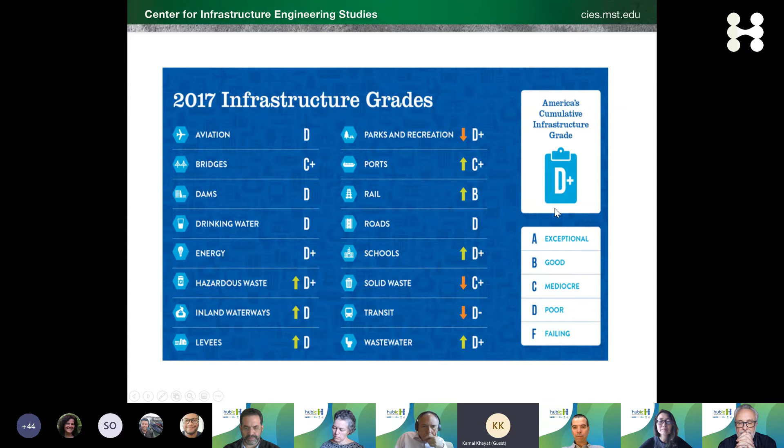We're talking about the infrastructure. As you know, if you travel to the US, the infrastructure in the US is in great need for reconstruction or rehabilitation. All the type of infrastructures, you see that American Society of Civil Engineers gives the infrastructure a failing grade, a D+. I mean, if you're a student, you don't want to get the D+ in a class.

And the National Academy of Engineering in the report in 2008 identified 14 grand challenges, and one of them is to restore and improve the urban infrastructure. And they said to redo this, you have to do it using novel construction materials, new construction, and monitoring methods. And also you need to get more automation in the construction industry.

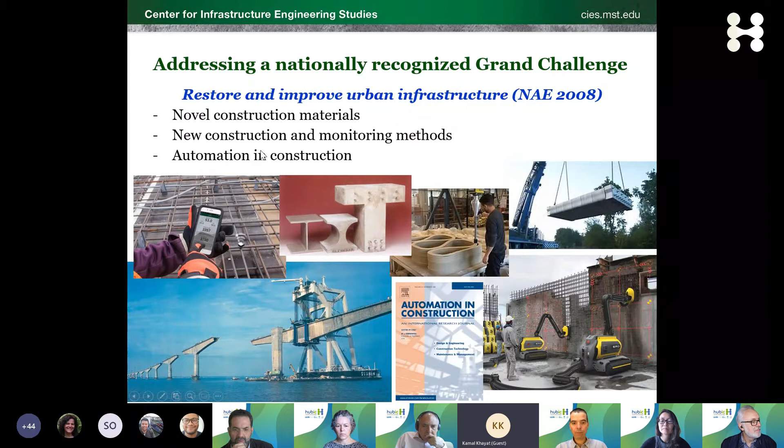So everything that we are talking about in this presentation, and I think also in the HubIC chair, is really dealing with these needs and these innovations.

So in my presentation, I'm going to talk very briefly about increasing the requirements for mechanical properties in concrete, increasing the requirements for service life and durability, productivity, and how the use of adapted rheology can help improve productivity and sustainability and resilient design. So in my presentation, I'll be also talking about some research results.

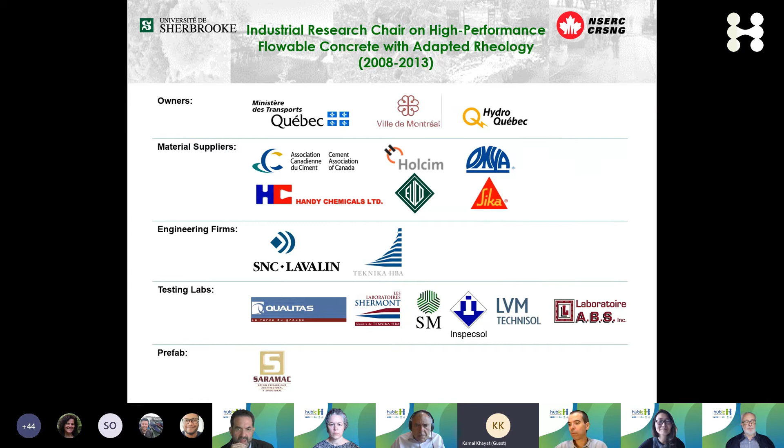Many of these research results were produced in an industrial chair when I was at the University of Sherbrooke in Quebec, in collaboration with 17 partners coming from owner agencies, public agencies, as well as construction firms, admixtures, very much similar to what I understand HubIC is trying to do. And the purpose of that chair was to develop knowledge and implement that knowledge for high-performance concrete with adapted rheology.

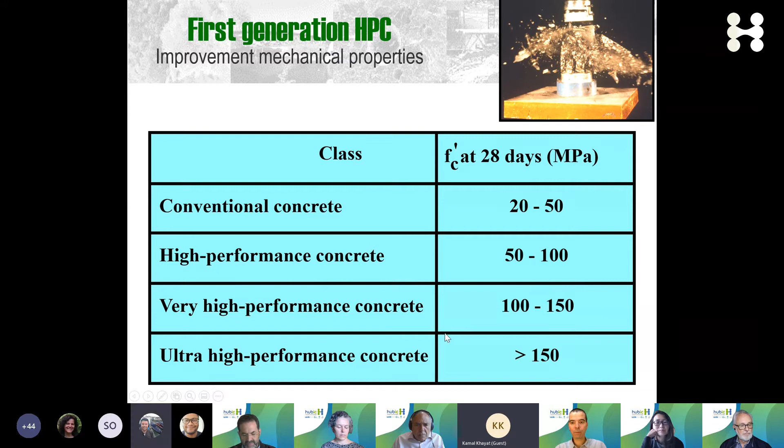So the first generation, I'll be speaking about 3 generations of high-performance concrete. The first generation is a race to mechanical properties, and I'm sure you've seen this classification of what is considered to be conventional high performance, very high performance, and ultra high performance.

This is a signature project in Seattle, in the state of Washington. It's a moment resisting frame in a seismic area and highly windy area, where the designer decided to use very high strength concrete in the core of this high-rise building, which is a steel frame, but in the core of the building, these are measuring 10 meters, and they're trying to fill them up with high-strength concrete to increase the elastic modulus.

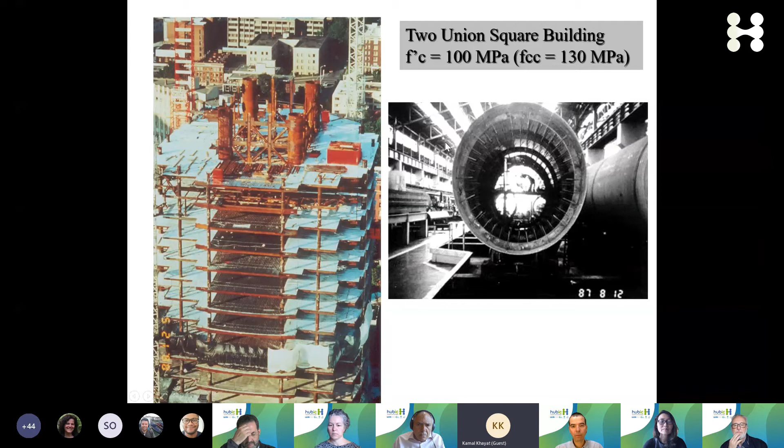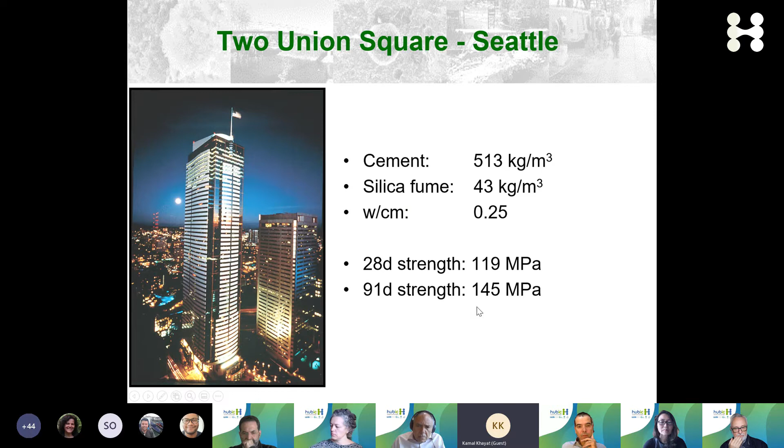This project was a key project because it took place in the late 1980s, and it was really a world record in terms of producing high-strength concrete outside the factory or a lab. You can see here the mixture design and the compressive strengths as delivered after 28 days and after 91 days were really very high-strength concrete.

High-strength concrete, we're talking about low carbon emission, etc., is really a very sustainable material because of its durability, but also because of its ability to reduce the amount of concrete that you can use for construction.

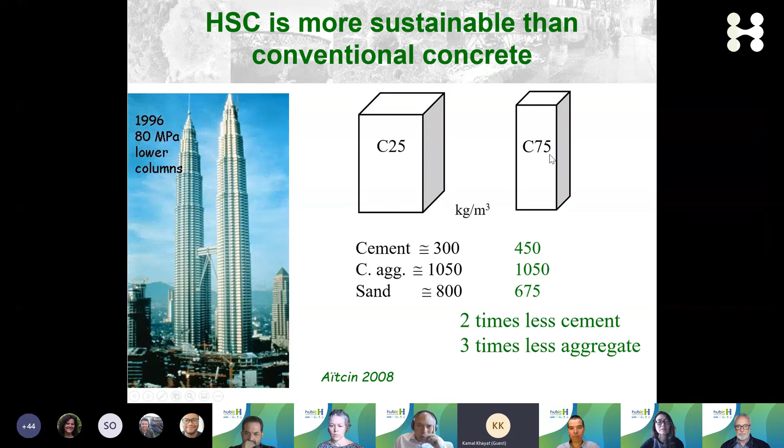This is a typical high-rise building, the Petronas Tower. You can see if you were to use a compressive strength of 75 MPa, you can reduce the element size versus 25 MPa. Although you are using more cement and more materials, comparing element by element in the building, you can be saving 2 times cement and 3 times aggregates, both coarse and sand, if you are using high-strength concrete. So that's also a mega trend, using high-strength concrete to reduce section widths.

High-strength concrete also has been used quite a bit in the offshore industry, starting in Norway and here in Canada in the late 1990s, a gravity-based structure for the Hibernia offshore structure. This is a massive structure, 55 meters in depth and about 100 meters in length. The walls are extremely reinforced, 3 meters, 1 meter in thickness. This was designed as air-entrained concrete with 90 MPa design strengths after 1 year. And again, that was a record.

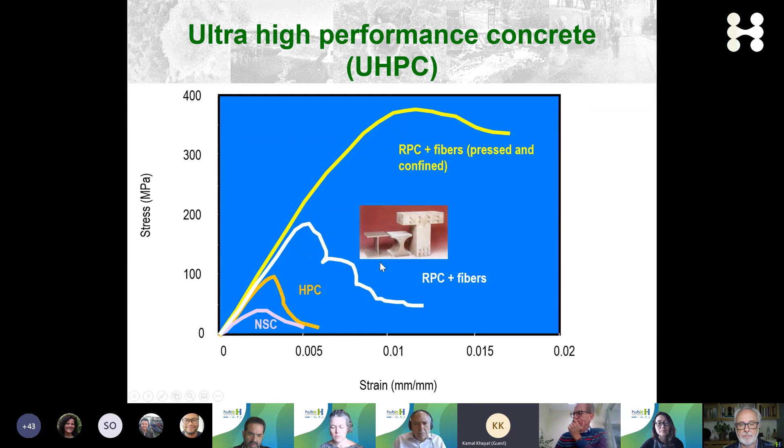The record of high-strength concrete was shattered in the late 1990s by the introduction of, at the time, what was considered reactive powder concrete, now that we call ultra-high performance concrete, that can develop a compressive strength of 200 megapascal. And if confined, it can develop a compressive strength of 375 megapascal, which is the same structural capacity of steel. So by using UHPC, you can produce sections that are a lot more thin and a lot less wastage of materials. This is the first application of UHPC.

It took place at Sherbrooke, where Professor Aïtcin was working, and at the time I was assistant professor helping. This was a project that was done with Lafarge and Rampoulin and Bouygues, a French company. You see that the thickness of this bridge, a pedestrian bridge, is only 3.5 centimeters, and compressive strength is 200 MPa. When confined in these galvanized steel truss elements, you get triaxial behavior of 375 MPa.

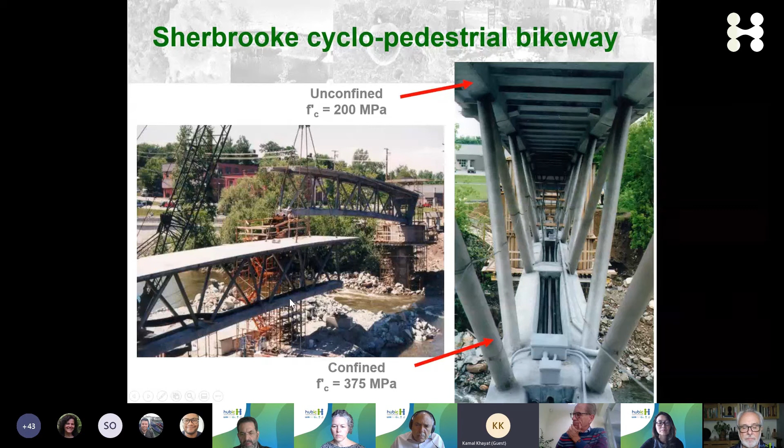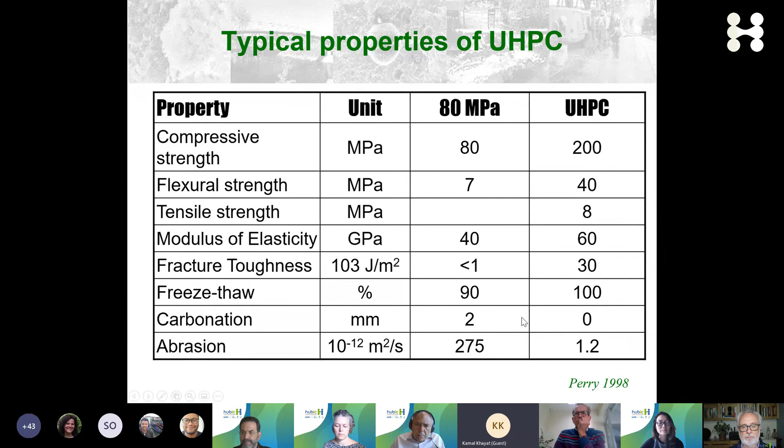Very elegant design. If you compare mechanical properties of a UHPC versus high-strength concrete, you can see the flexure strength is very, very high. The elastic modulus, and what's really important also as we make transition to durability, this is extremely durable material. So if you're trying to extend the service life, this is really a very good choice to consider.

In the US, it has been penetrating the market quite a bit in the area of transportation infrastructure for the production of very high strengths, very high ductility and resilient structure elements, such as these bridge elements here.

But more recently, we've been seeing some really innovative design. This is here what they call a pi element, where you can see the sections are very, very thin and taking advantage of the structural behavior of the concrete where you need it, in the flexural zone, in tension, here in compression.

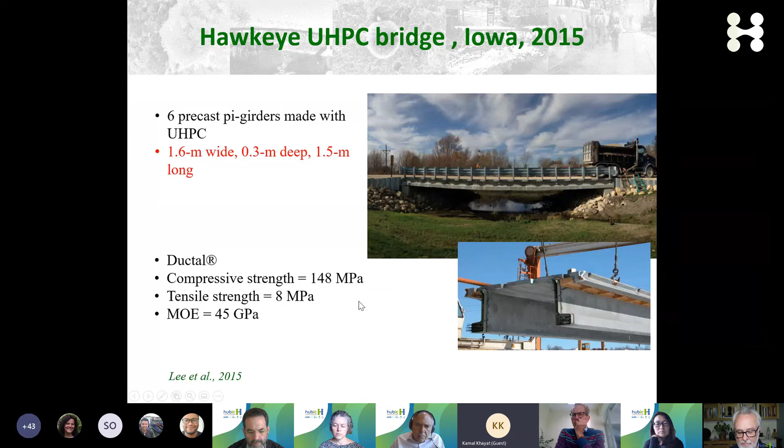At Missouri S&T, through the Recast University Transportation Center, we've been working with our partners to try to reduce the unit cost of this UHPC by making different innovations, whether it is on the selection of the binder materials, or the fibers, or the sands, trying to reduce shrinkage and cracking of such concrete.

Our designs quite a bit are driven also by rheology. These concretes are extremely fluid, but also extremely viscous, making it much more difficult and time-consuming to cast them. We could see here some of the proprietary mixtures, like the one that was used in Sherbrooke, with 22 to 25% silica fume, which is highly viscous.

By using different supplementary cementitious materials, fly ash, slag, silica fume, and combinations, we can reduce the viscosity. That means the material can be a lot easier to work with.

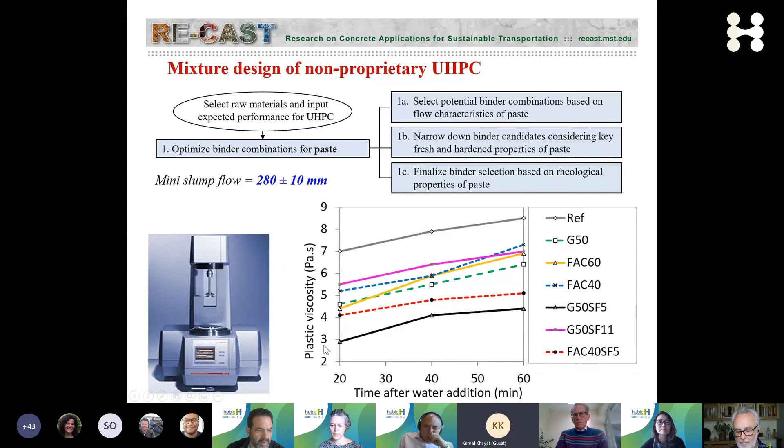We've also replaced some of the very fine sand, quartz sands, into regular concrete sand, working with packing density and so on. If you compare these mixtures, for example, this one is a GGBS slag cement, 50%, and 5% silica fume. It gives you very similar mechanical properties as that of proprietary mixture, which is 25% silica fume. Here we have splitting tensile strengths, flexural strengths, elastic modulus, and the last one is the ductility. So very similar, 100% or above.

This one is, we pushed it a lot with fly ash. Some of the US states don't have slag or silica fume, so we do have to use some fly ash.

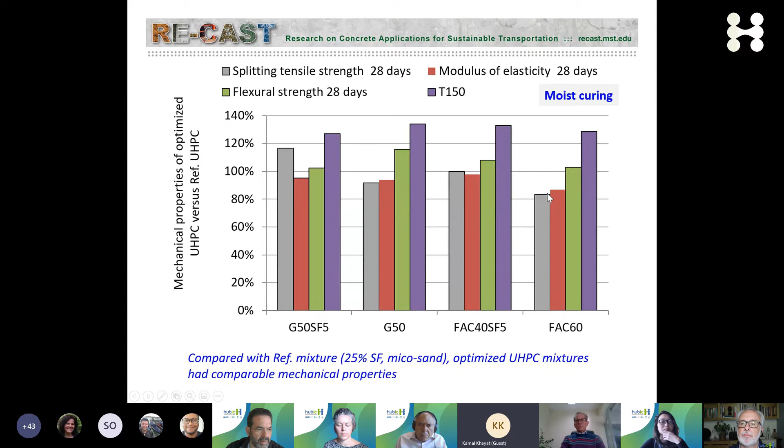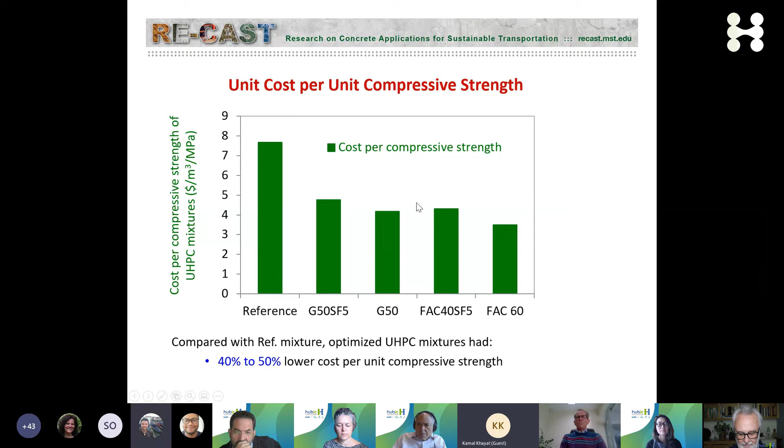We could see some reduction of strengths. Unit cost is very important. This afternoon I have to do a unit cost for our DOT because we're doing a bridge deck using UHPC next summer. Compared to reference concrete that costs about $8 per cubic meter per MPa, non-proprietary mixtures can be 40 to 50% less, which is a very big advantage for market penetration.

If you look at the shrinkage, this is autogenous shrinkage - meaning chemical shrinkage and self-desiccation - which is very, very high, 700 microstrain for reference concrete. By using supplementary cementitious materials, we can reduce that quite a bit, and that's important for service life.

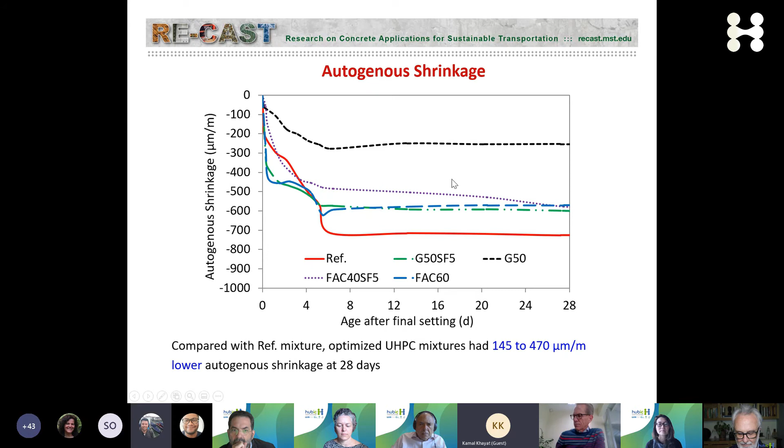In the US, we've been having a lot of automation in construction, where a lot of the fabrication of bridges is taking place in manufacturing plants, and sometimes even on site, and they're pushed in place. This trend is called accelerated bridge construction. In this case, you have bridge deck elements that are prefabricated and placed together and then bonded together using UHPC in these sections. As you can see, UHPC is highly flowable, but very, very viscous.

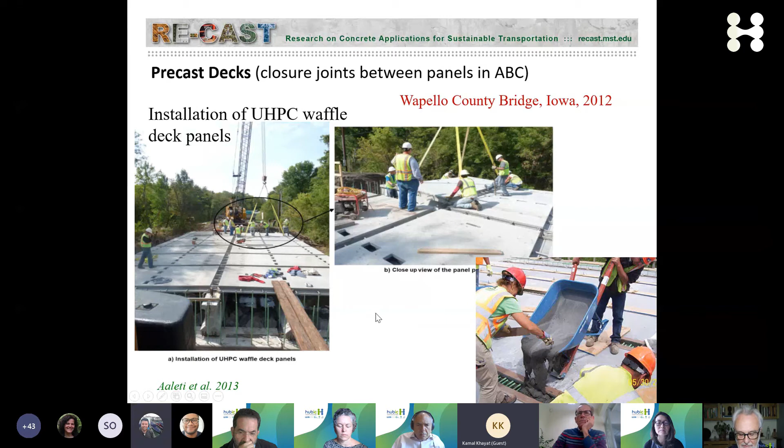This is a bridge inspection I was at last year or two years ago in New York DOT, and this is the concrete that was done using UHPC. I noticed something very interesting: we have some cracks, mainly because of autogenous shrinkage, but you don't have any signs of corrosion. Where there are no cracks, you see some pit corrosion very, very close to the surface, meaning that the fibers are at the surface.

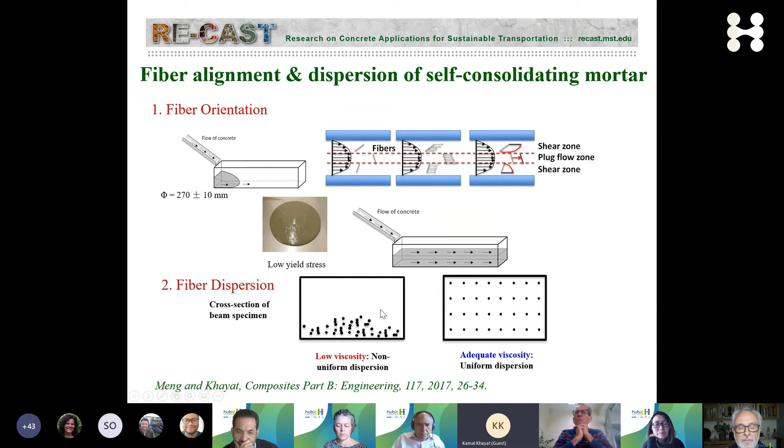So we've been working on adapting the rheology of the suspending mortar to enable the concrete, as it flows, to orient the fibers in the direction of the flow. But when the flow stops, this very highly flowable concrete adapts the viscosity and thixotropy to be able to suspend the fibers. We've been working on different procedures, and each of these lectures can be elaborated later on in our discussions in the coming year, if you have interest. But here I'm just giving you a small teaser about some of these technologies.

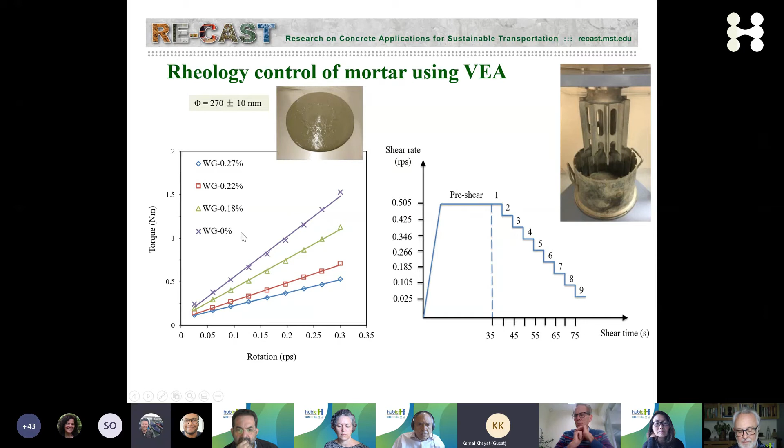By using some viscosity enhancing agents, we can enhance the viscosity of the concrete, and by doing that we can increase the flexural strengths and the toughness. For example, here, if you don't use any viscosity modifier, you have a flexural strength about 27, 28 kilonewton - so about 30 megapascal in flexural strength. By adjusting the viscosity, adding Welan gum, you can quite a bit increase the flexural performance because you're aligning the fibers in the direction of the tensile load, and you're also increasing a lot the toughness.

This is for 1% fiber, 2% fiber, 3% fiber, depending on the structural applications. We use 1% all the way to about 3.3% steel fibers, and these are the microfibers that are 13 mm in length.

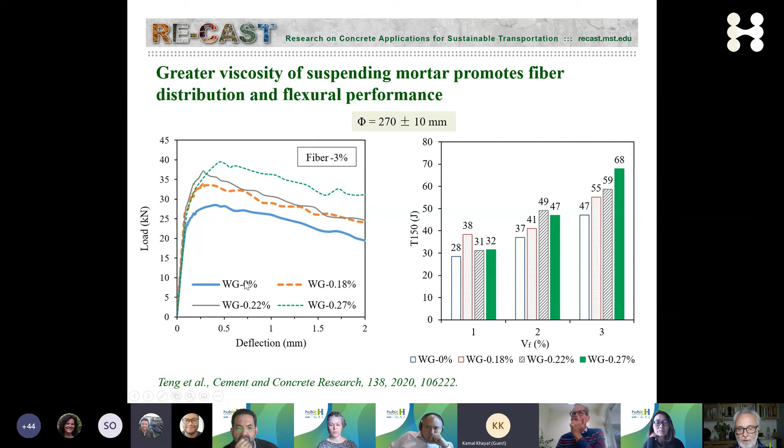Second generation high performance concrete is really the one that is very used, seeking high service life and durability in marine structures, in bridge decks in urban areas, as well as in pavements where you can get 50-year plus service life.

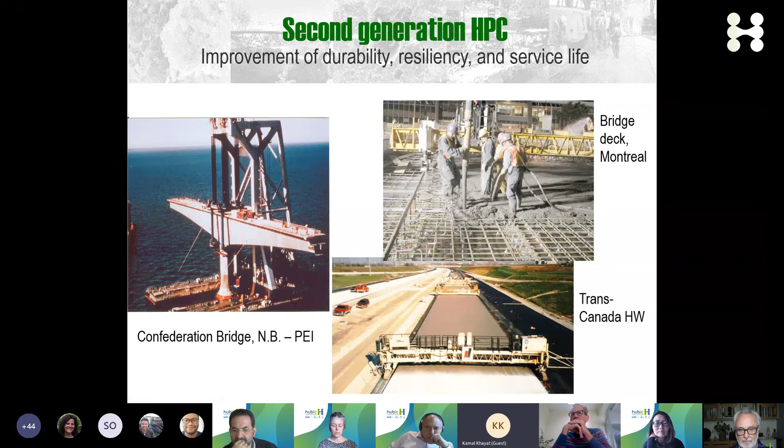But bridges, especially bridges, are subjected to very high solicitation, in this case a marine environment. This bridge here is the longest bridge at the time it was constructed. It was inaugurated in 1997 in Eastern Canada, and the service life that was designed for that bridge was 100 years. Now you can reach 100 years by using high performance concrete that gives you very, very high corrosion resistance.

You could see here the chloride diffusion coefficient is about 10 times less than that of conventional concrete, and the electrical resistivity is about 10 times also greater than that of conventional concrete. So the service life is not 35, it's 100, and now we're even designing for 125 plus.

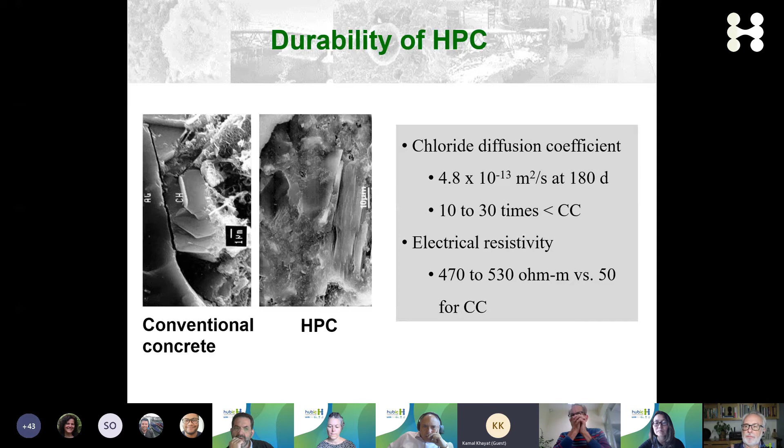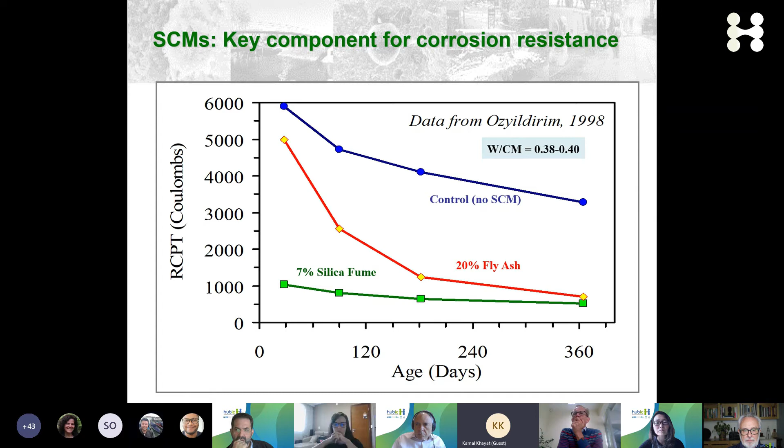You're all familiar, I'm sure, with the rapid chloride permeability, sometimes referred to as the Coulomb test. Here you could see some work from Virginia DOT with high performance concrete, using fly ash or silica fume. Compared to control concrete, we can reduce quite a bit the electrical conductivity of the concrete.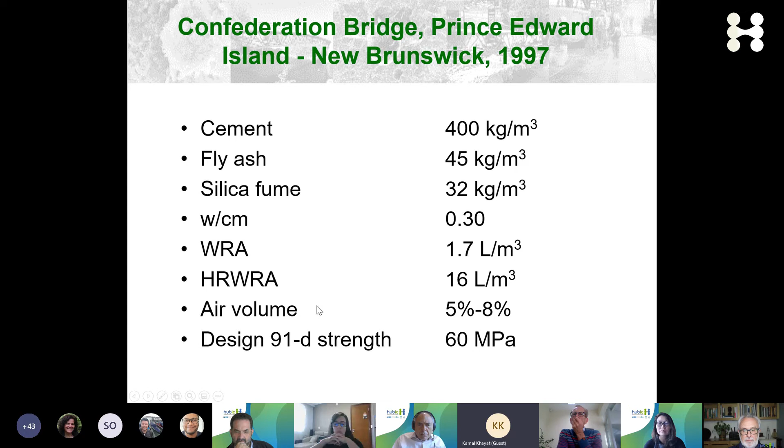This is exactly what was done when the bridge was inaugurated for the bridge deck. This is a mixture design for what they call a C60 MPa concrete: cement, fly ash, silica fume, low water to binder ratio, and a whole suite of chemical admixtures to make the concrete workable and durable.

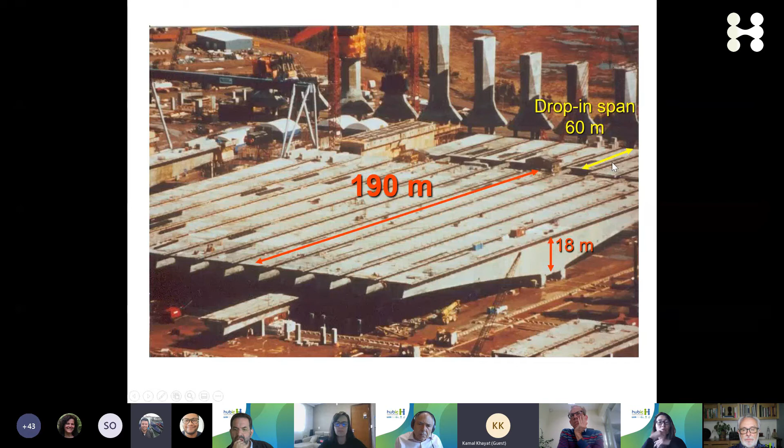At the time of construction, this was the biggest construction project in the world, but also the biggest precast concrete yard in the world on both sides of the bridge. These are pre-stressed precast girder elements. You can see the lengths of them, 2 football fields, and the small ones. And then you have also all the piers on both sides.

In some areas, they use very high strength concrete for abrasion resistance of ice. The gantry used for this construction was brought from Denmark and Sweden, where it was used for a link project, and was increased in capacity by 25%. This is the biggest, heaviest marine lift ever, 7,500 tons, to position the precast elements on this bridge.

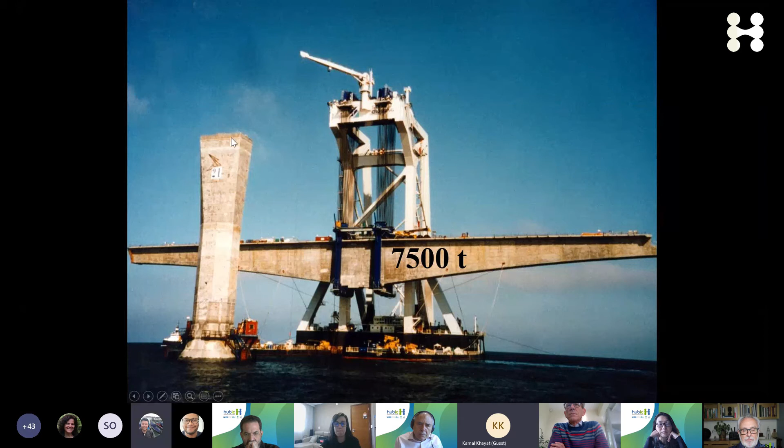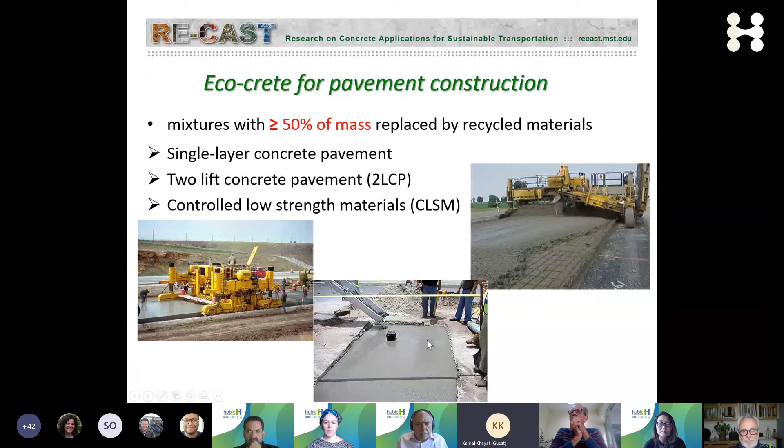Through the Recast Center here at Missouri S&T, we've been working on pushing the envelope on eco-concretes by using highly durable concrete for pavement construction, but also concrete containing at least 50% replacement of everything - the sand using recycled materials, the cements, even recycled water, recycled tires, steel tire belts for fibers - seeking to use it for pavement construction, either single lift or double lift. This is a double lift, where you can load the lower lift with higher content of SCMs or higher content of recycled aggregates. Some of the fines can also be used for controlled low strength materials.

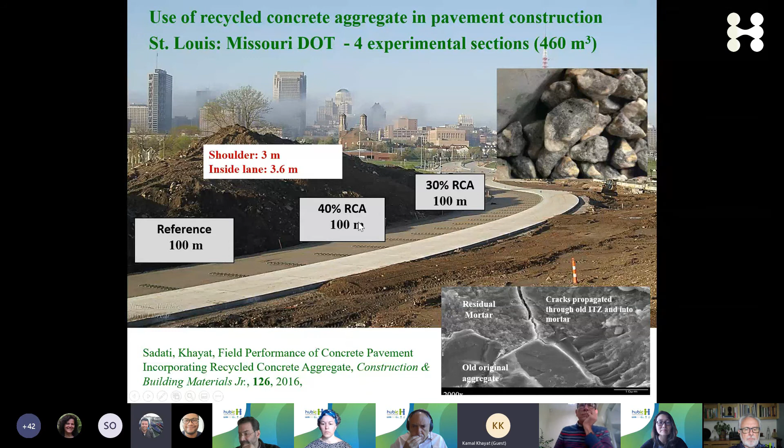We've also been using quite a bit of recycled concrete aggregate. This is recycled concrete coming from our airport in St. Louis that was put to use as a test bed with the city of St. Louis and the Department of Transportation of Missouri, to construct test beds of concrete pavement with 30% recycled concrete aggregate - this is coarse aggregates - and 40%, and also another 40% using a different procedure for mixture design.

So I'll be happy to report on these findings in the future. And finally, I'd like to talk about the new trend of high-performance concrete, and this is high-performance concrete with adapted rheology.

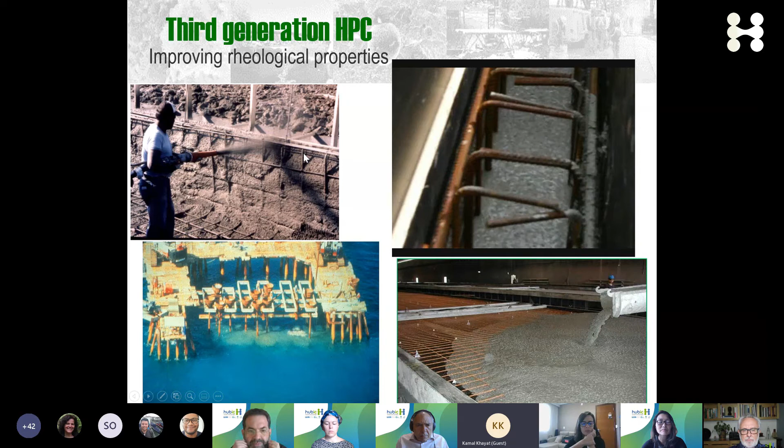You know it all because of shotcrete, or underwater concrete, or SCC. For all of these concretes, we have to pay attention to rheology. I know at University of Sao Paulo, I'll be collaborating with faculty members there to teach a graduate class. We'll be talking more about rheology, but rheology is the science of flow of matters.

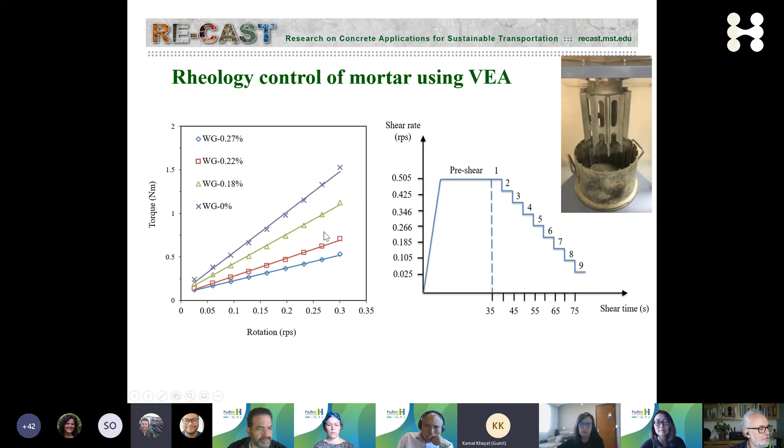We have a rheometer, which is basically a mixer, mixing concrete at different rotational velocities. At each of these velocities, we're measuring a torque. When we plot the curve, we get an indication of the slope, and the slope of that curve is what we call plastic viscosity. The interception of that curve with the vertical axis is what we call yield stress. So yield stress is the resistance to flow before flow starts, and the viscosity is the resistance once the flow occurs. Higher viscosity can be associated with, for example, molasses or honey, versus lower viscosity like orange juice, Coca-Cola, or water.

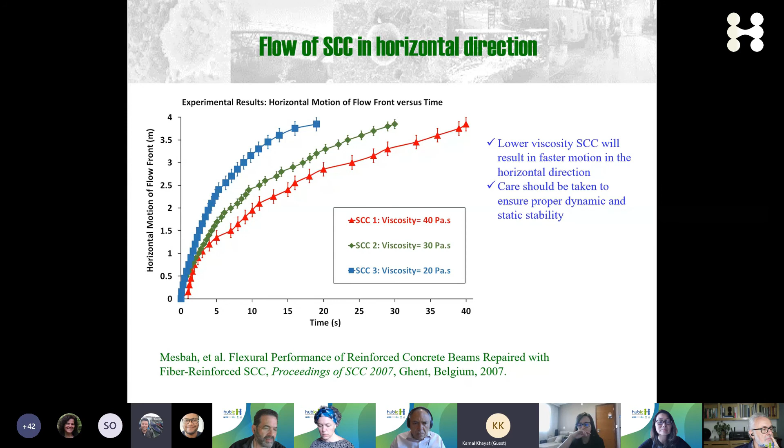At the same time, we have to be careful about the stability of the material so it does not segregate. SCC made it into the market starting in Japan in the late 1980s, using SCC in big infrastructure elements. Reported by one of the big construction companies, using SCC allowed them to reduce the number of workers by 100, and reduce the construction time by 20%. So I know productivity is very important.

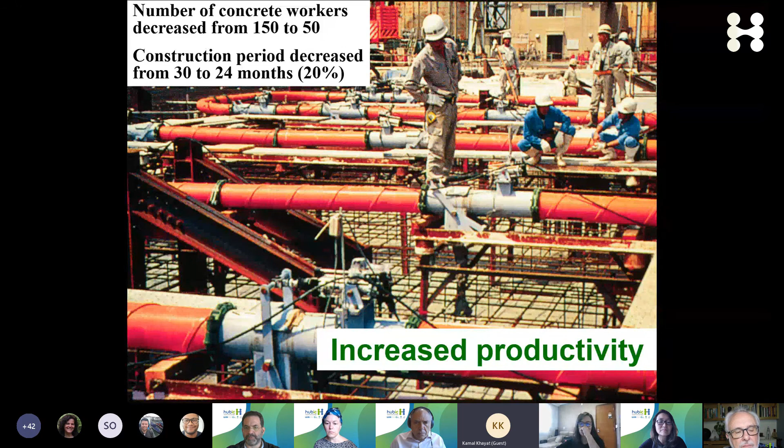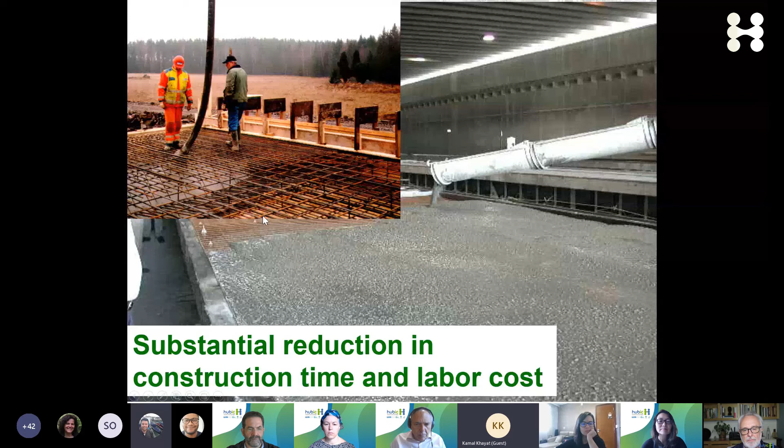In the precast industry, there's great improvement of productivity by using SCC, where you can cast concrete with reduced workforce. This is in Stockholm, Sweden - a bridge deck, small span, constructed basically with concrete casting with 2 people, even putting their hands in their pocket because it was a cold day. They just have to displace the pump. But also, this type of concrete allows you new innovation in construction.

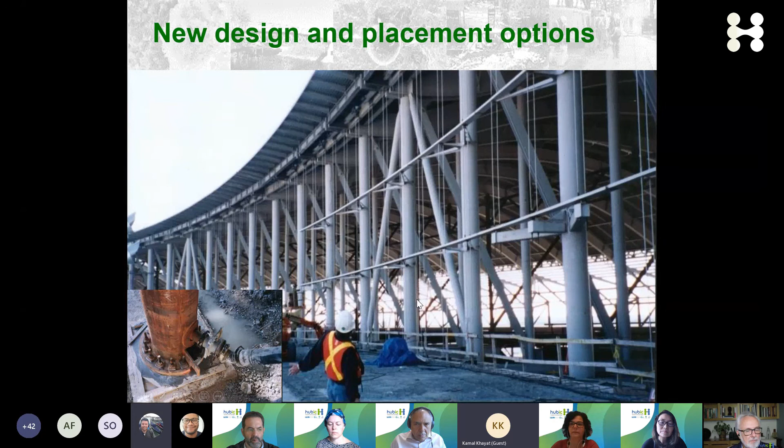In this case, hybrid elements, where you have reinforced concrete that is pumped into or constructed into steel tubular elements. This is in Toronto, where concrete is pumped from the bottom, 30 meters up to the top - 12 cubic meters of concrete pumped using SCC. Also very nice surface texture - architects like concrete like this because it gives you a uniform surface texture.

So in high-rise buildings, in the precast elements, for architectural elements - this is a Miami parking garage. All the wall elements, the stairs, the double T's, everything here is using SCC, again because of the productivity, facility of construction, and also reduced costs and higher aesthetic quality.

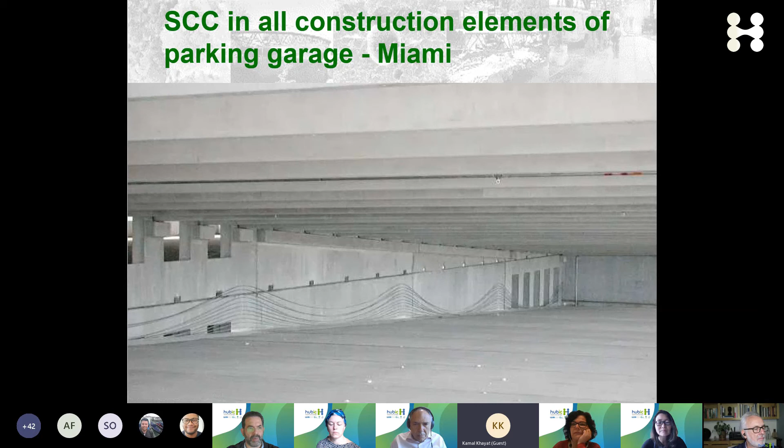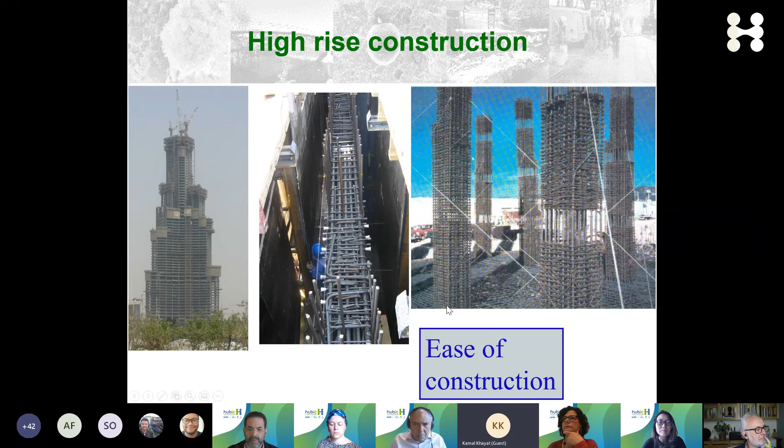In some areas, this is Burj Khalifa in Dubai that you see over here. You have structural elements, shear walls that are highly congested. This is San Francisco Bay Area, moment-resisting seismic design, where you have very high congestion. Use of highly flowable concrete all the way to SCC can really ease up the construction and ensure quality.

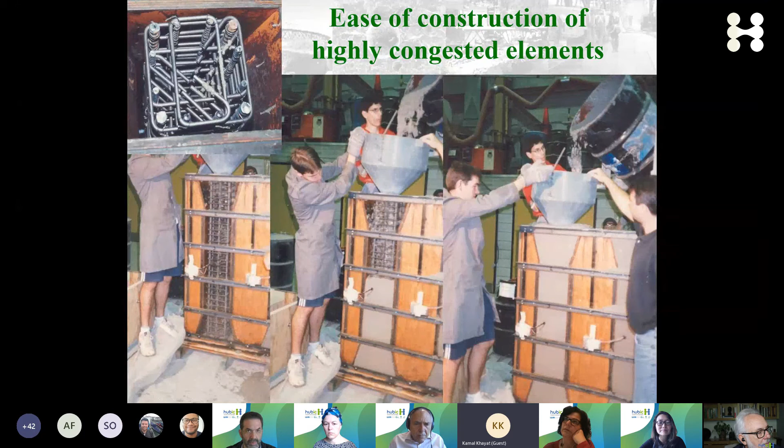In the lab here, we tried to reproduce some of these structural elements in seismic areas. This is about one-third of a cubic meter. Using SCC, it takes about 30 seconds to fill this. You fill it up like water. If you were to use high slump concrete and do it layer by layer with internal vibration, it takes about 15 minutes versus 30 seconds. And the structural performance is very similar.

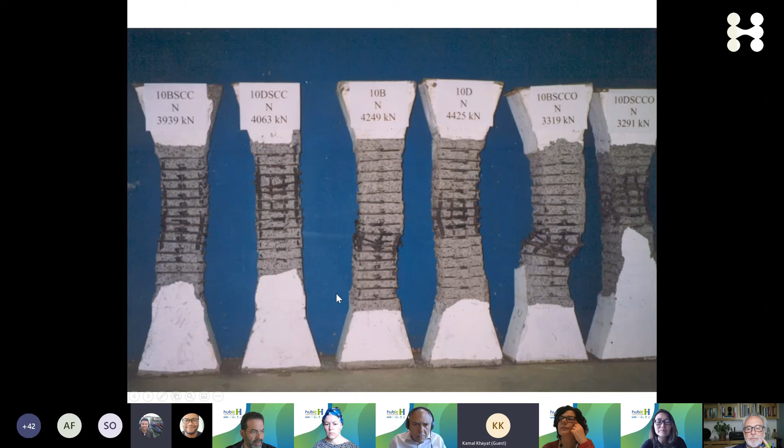You could see a slide here that helps me. The structural performance of the SCC are the ones at the bottom. You can see very, very high ductility compared to the structural performance of high slump concrete of the same strengths.

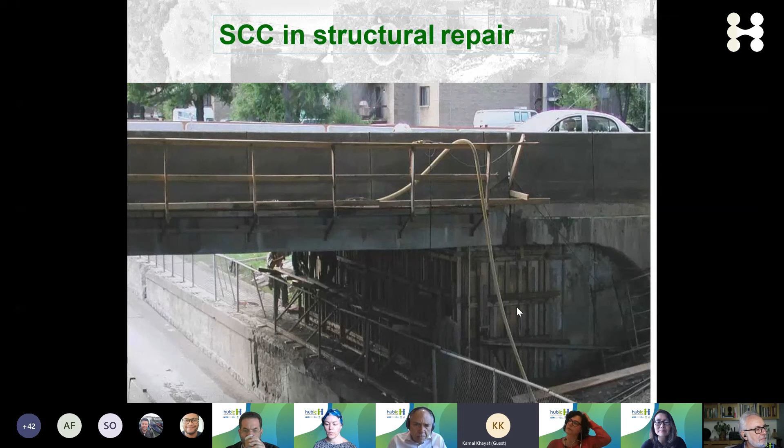SCC has made a really big impact in rehabilitation. So in the US and other countries, we have to rehabilitate and reconstruct. In this case, with the city of Montreal, abutment walls are repaired using SCC. The contractors love it because they have to form this and just put some holes in the middle and fill it up like you're filling gas in your tank. Once it reaches the middle, they close those holes, go to the top, and continue the repair.

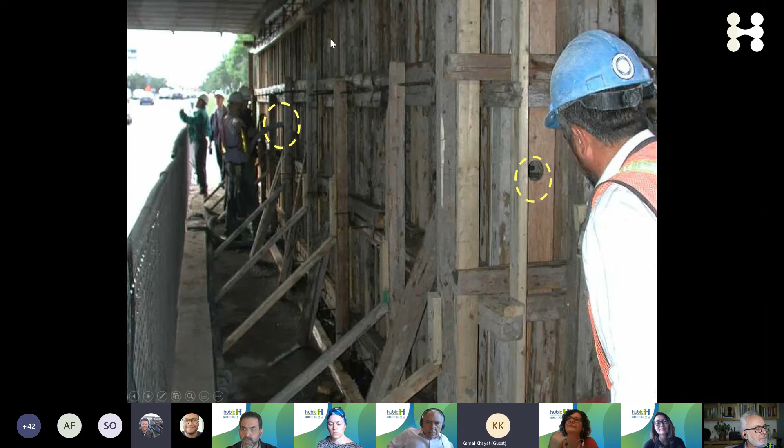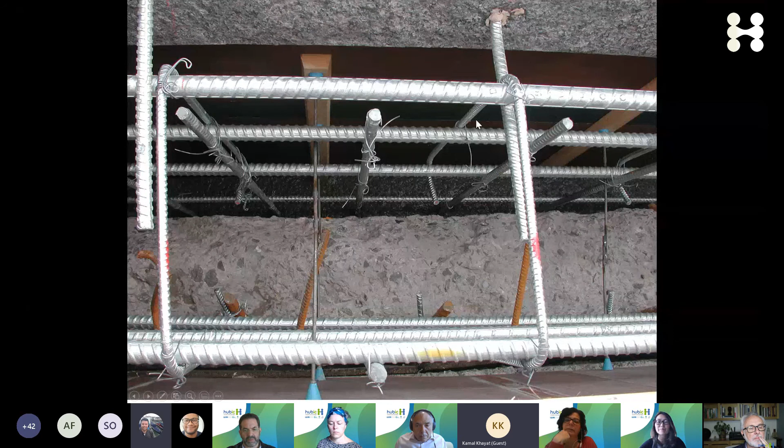And the repair looks like this. You have the existing concrete, and then there's a section of probably 20 centimeters that is reinforced with new reinforcement that has been formed, and then you cast concrete again. It adheres very well to the surface and gives you very nice surface quality, and also highly durable results.

This is in a Nordic area where durability is a big design issue. You can design the concrete also to have high resistance to restrained shrinkage by using fibers. We've been using both synthetic and steel fibers to increase the service life of the repair, double the life, by reducing the restrained shrinkage of the SCC.

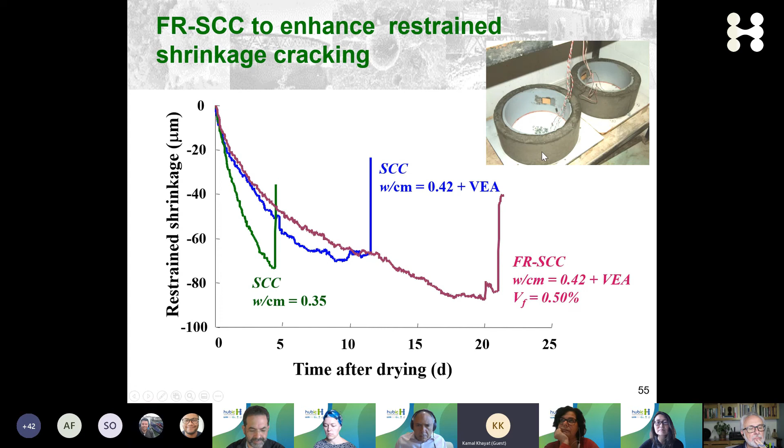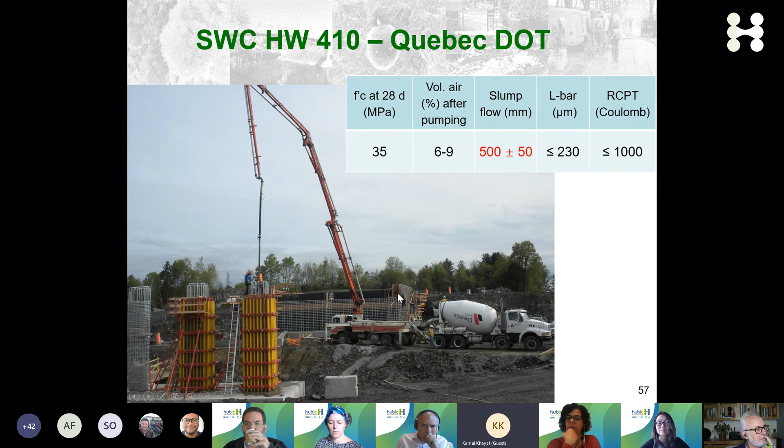In our industrial chair at the University of Sherbrooke, we teamed up with our DOT and our industrial partners, and designed some concrete that was implemented in a bridge. You can see here the slump is not 650 plus or minus, it's 500 plus or minus. The design strengths, the durability, everything is the same as high-performance concrete. It was cast for those elements.

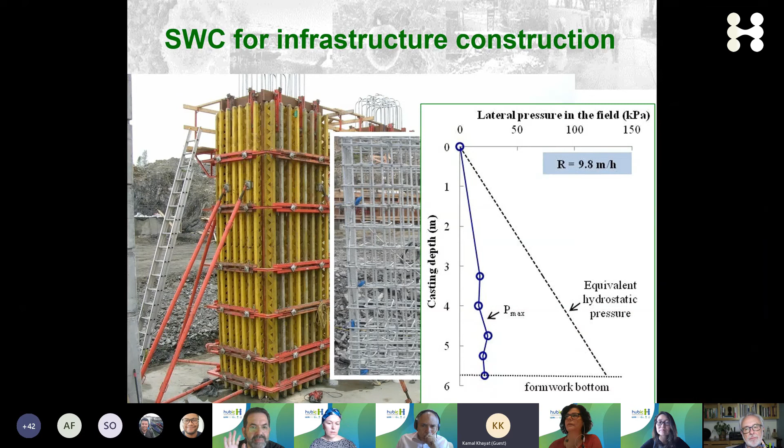You see our technicians here, we were interested in form pressure. Form pressure was very, very low, much lower than that of SCC. It was a very robust and cost-effective material that gave very good surface finish and very good performance.

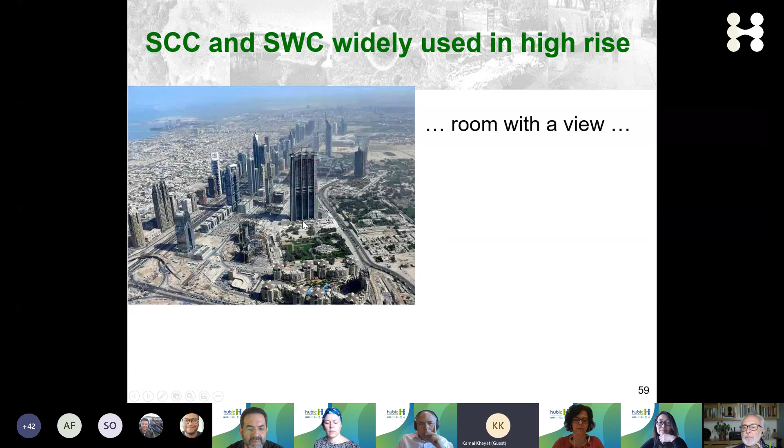So this self-consolidating concrete, or SCC, has been really used as a conventional concrete construction material in many high-rise buildings. And I think some of you would recognize where these high-rise buildings are. This is a view from a very famous high-rise building on a clear day, and this is the same view on a cloudy day. In that part of the world, a cloudy day happens only maybe 5-6 days a year.

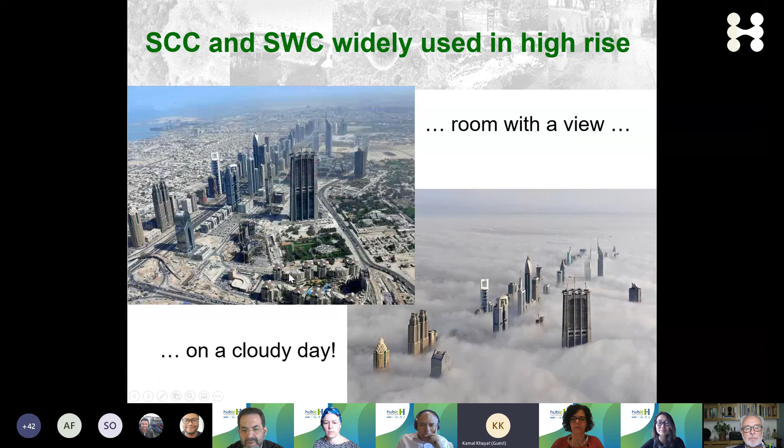But all these towers, the vertical elements, the shear walls, the columns, a lot of them are pumped using SCC. So the view is from the top of Burj Dubai, which was finished in 2009. This is the world's highest high-rise building. And it was constructed in a record of 5 years, starting from the foundation all the way up.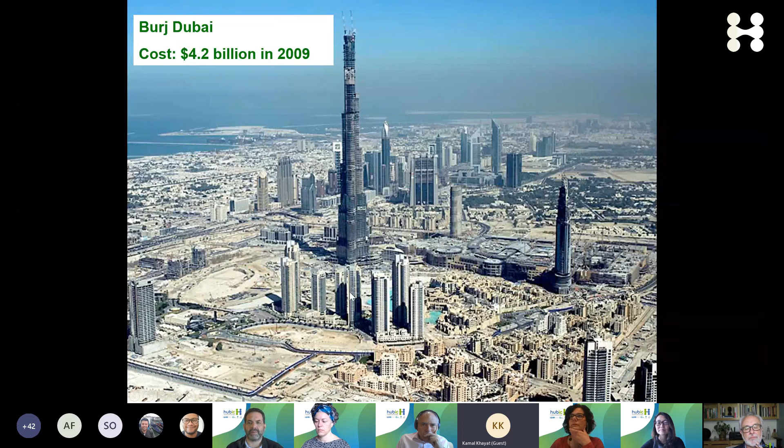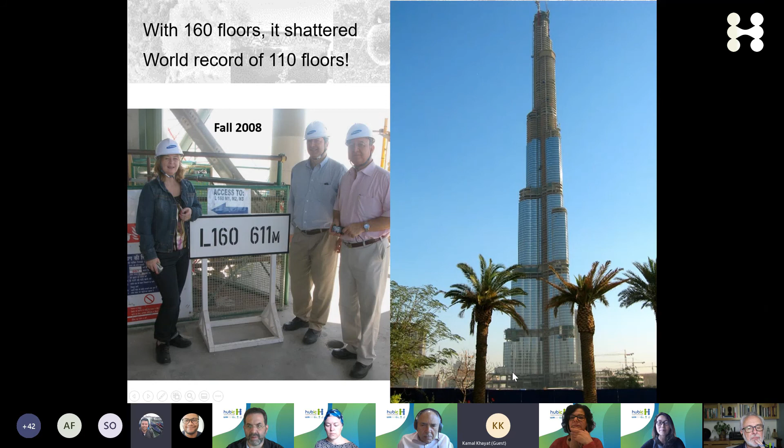This is the foundation. SCC was used in this as one of the early projects in high-rise buildings for the caisson drilling shafts, 55 meters, which were at the time a world record, plus the mat foundation that had to be mass concrete. It was also used all the way, pumping all the way to 160 floors, which is 611 meters. We had a conference in 2008, and we visited this floor that was just completed, and you could see it shattered the world record by 50 floors. So concrete was pumped all the way up, single stage pumping, using SCC.

These are the properties of the SCC. The concrete that was used there was what they call C40 and C60.

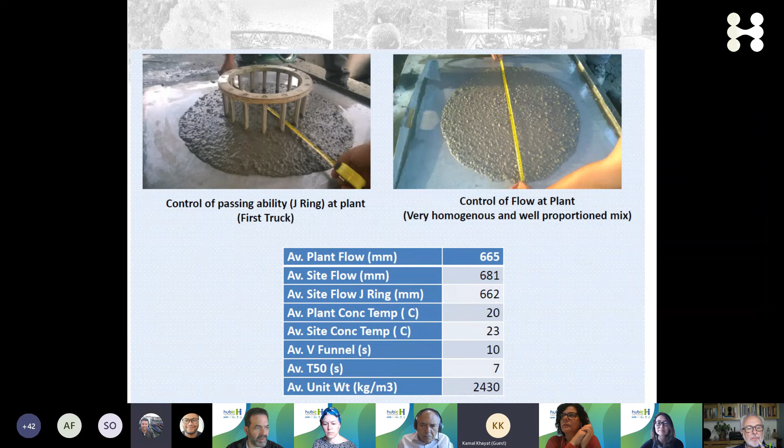It was challenging, but now we are dealing with C80 and C90, which is a lot more challenging. In high-rise buildings that are difficult, there's quite a bit of trials where the contractor, the concrete supplier, and the material suppliers team up together to do pumping trials to select the materials, the mixture proportioning, the admixtures. This is quite expensive and really is trial and error.

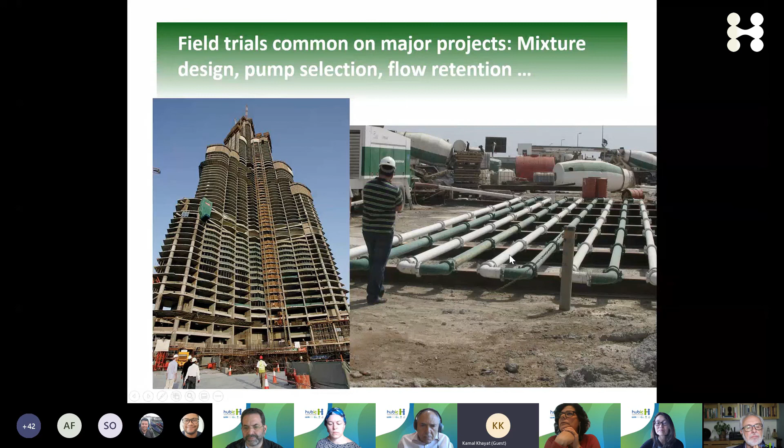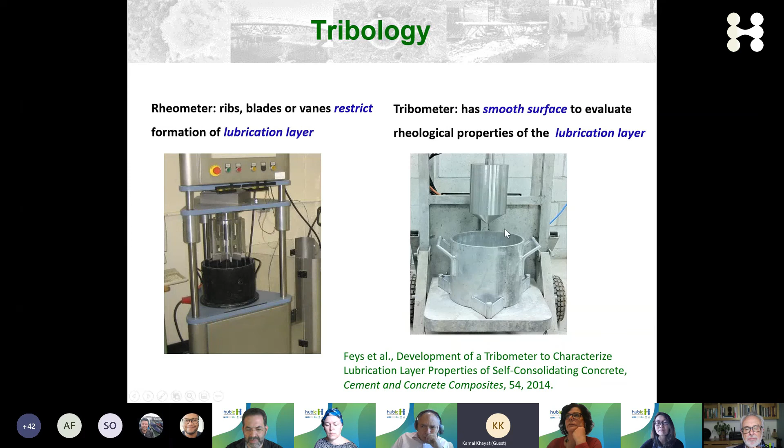But there's been quite a bit of improvement in the science of rheology, both the rheology of the bulk concrete and the rheology of the lubricating layer, which is a very thin layer, a couple of millimeters thick, adjacent to the pipeline. Here at the University of Sherbrooke, we did quite a bit of pumping trials with instrumented pipelines. It's only 40 meters, but we pumped concrete 26 times. This was in preparation for the tower being designed for Jeddah in Saudi Arabia, a 1 kilometer tower.

They needed very high strength concrete, C80 and C90, for pumping 1 kilometer. You can see here the pressure loss versus discharge rates. If you take a high strength concrete at 0.34, the pumping pressure is not very high. But if you go all the way to 0.22 for high strength concrete, for the same discharge rate, you have to apply a lot more pressure to push the concrete horizontally and vertically.

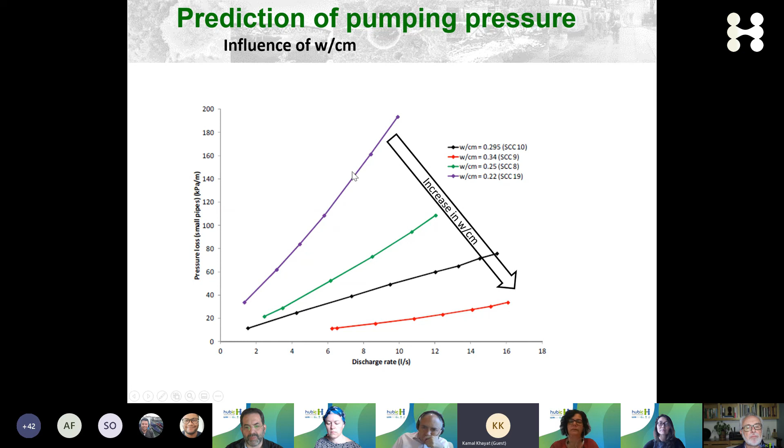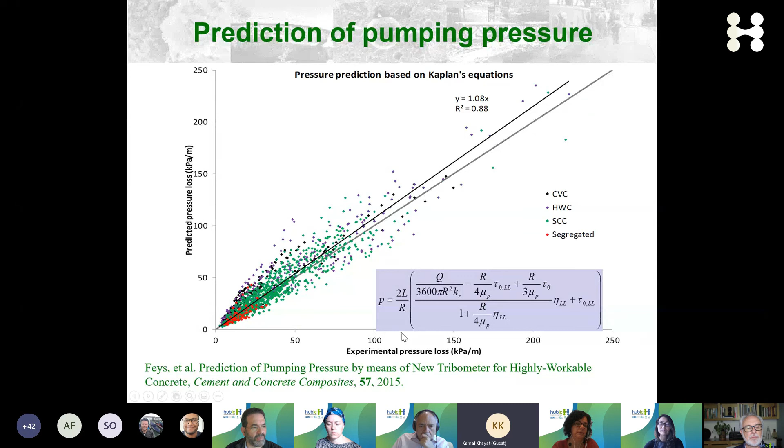We've done a lot of pumping and a lot of data collection, about 1,500 data points. You can see that the predicted pressure in kilopascal per meter is very similar to some analytical models developed by the group of François de Larrard in Paris in the late 1990s. So through understanding the rheology of the lubricating layer and that of the bulk concrete, we can estimate the pumping needed to push concrete a certain distance.

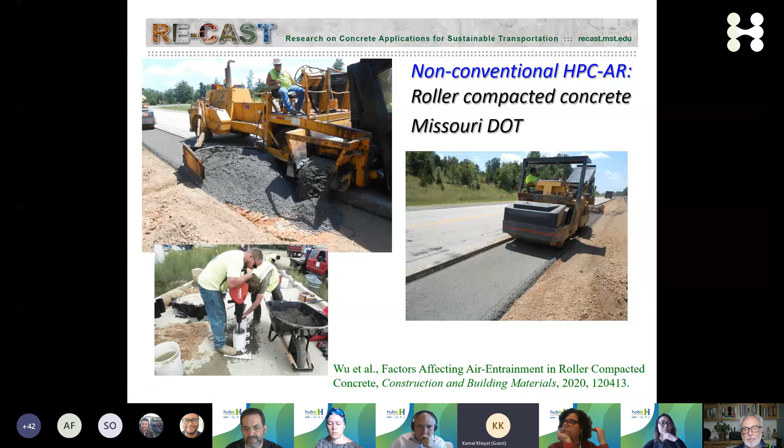This is roller compacted concrete, so it's not a conventional high performance concrete with adapted rheology, but believe it or not, the design of this RCC is very much affected by the rheology of this zero slump concrete. This was a field demonstration with Missouri DOT using different types of RCC, designed through a special approach for packing density of the aggregate, special selection of the binder, and also with a rheometer, if you would, for very low slump concrete.

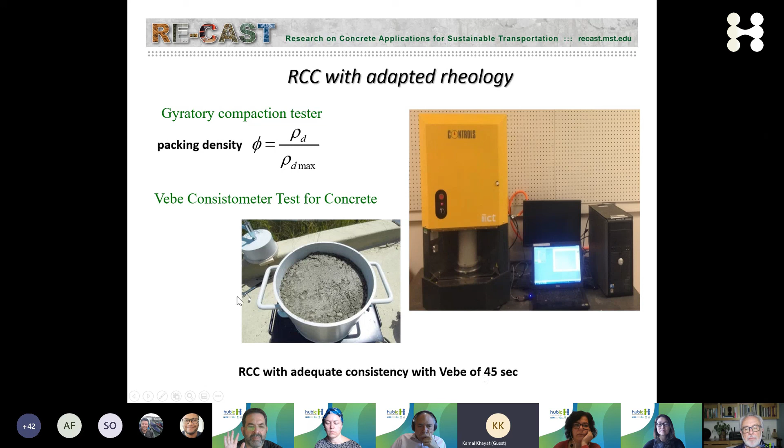This is a compaction, gyratory compaction tester, and it was compared to the Vebe consistometer. We found that if you reduce the Vebe time to about 45 seconds, it gives you much better productivity and consolidation effort.

I know you're very interested, and there's a mega trend in the world for automation in construction, so I couldn't leave that alone. As a follow-up of the development of high-performance concrete with adapted rheology, the question is how can you adapt the rheology so much to a material that you can pump it, extrude it, and then build it layer by layer to construct structural elements. So this is 3D printing.

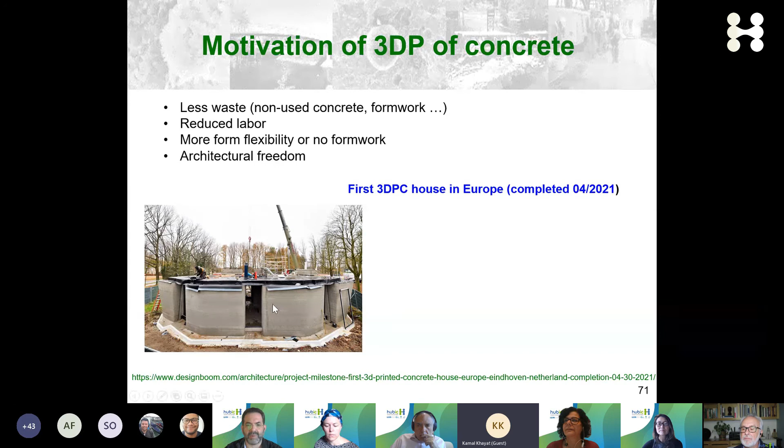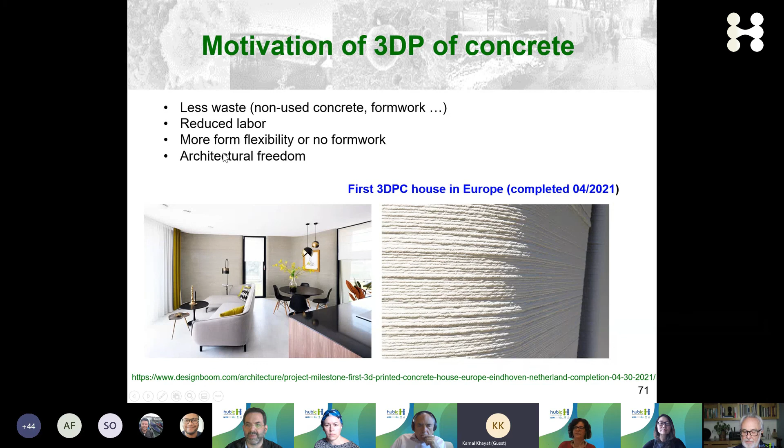Here I have a photo from a website of the first house constructed in Europe using 3D printing. You can see that it looks like a very nice open space with nice surface texture. These are about 10 to 15 millimeter layers constructed one by one. Obviously there are a lot of advantages in this new technology that is taking off around the world.

In closing, I'd like to say that in any technology, especially in the concrete industry, it takes time for a technology to mature. It starts with some basic research, some technical parameters that have to be resolved, some design and construction production issues that have to also be resolved. Standards and guidelines have to be developed to specify, use, and test. Then field validation and finally market acceptance. This cycle in civil engineering, on average, is about 17 years.

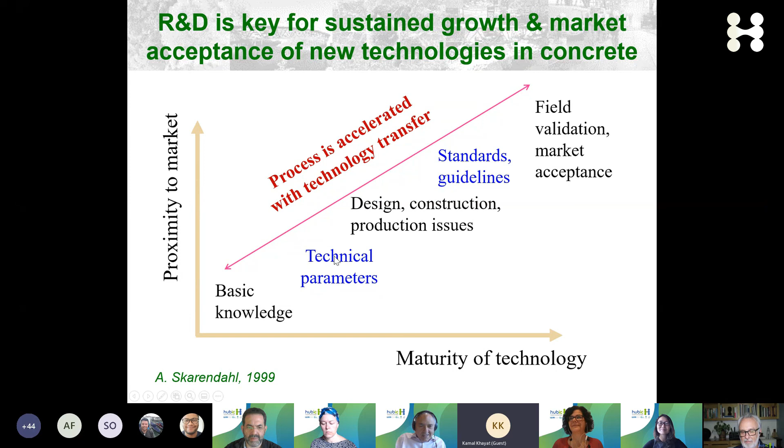We're about 150 kilometers from St. Louis. A few months ago, last December, October, we inaugurated a state-of-the-art research facility. It's called Clayco, which is a big construction company, Advanced Construction and Materials Lab. This is a facility fully dedicated to research for advanced and sustainable infrastructure materials.